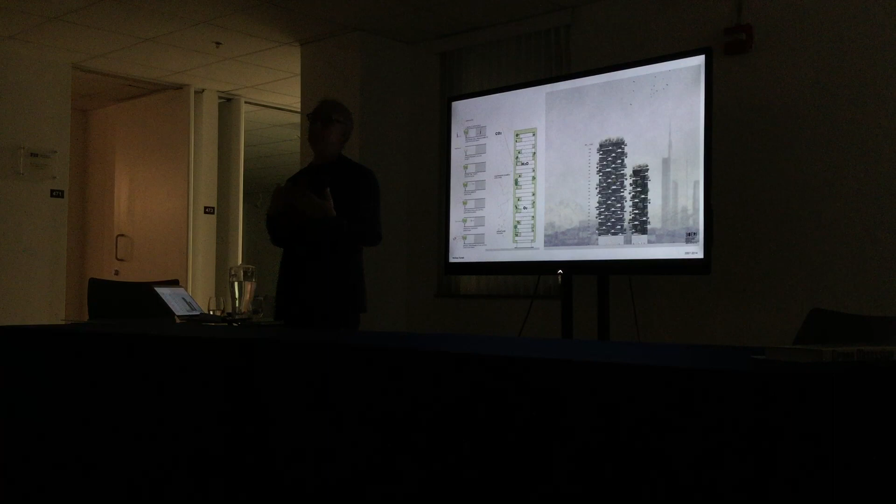So that was the beginning, an obsession of sorts, thinking how to put plants and have real trees, not simply shrubs or simple plants, on these two high-rise buildings. We started to study the possible contribution in terms of capacity to absorb not just CO2 but also pollution, the micro-pollution, the microparticulates produced basically by traffic.

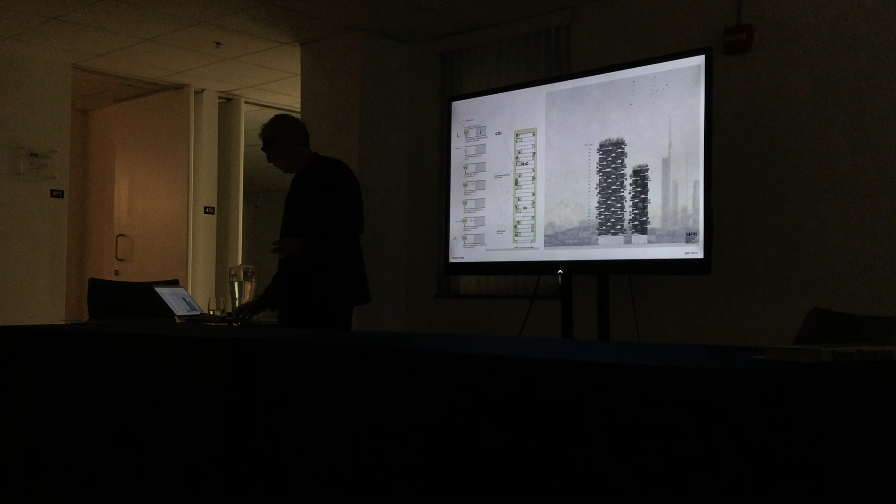We studied all that, and finally that's a result. This is a picture from some years ago. So basically we have here 21,000 plants in two high-rise buildings. One is 115 to 120 meters, and the other is 95 meters. In terms of feet, I don't remember now.

We also started to study the effects of that: how seriously they are contributing to reducing greenhouse gases, how they are cleaning the air, how they are protecting, and something super important, how they are shadowing the facade. So it's kind of a double facade, the biological facade and the artificial facade. The biological facade creates a microclimate condition that also shadows the second facade. The difference in summertime in Milano is about 3 degrees, not Fahrenheit, but Celsius, and it's quite important as one of the most serious effects of this tower.

Thanks to that, thanks to this prototype, which was really a result of something in between research and design, we started to work trying to improve what we did, and also to make this building like a real experiment. We studied the success, the expected success, and also the unexpected unsuccess, the problems, the limits of what we did. And when we finished building this, we immediately started to see how it was possible to replicate this concept of the vertical forest in different contexts, in different sites.

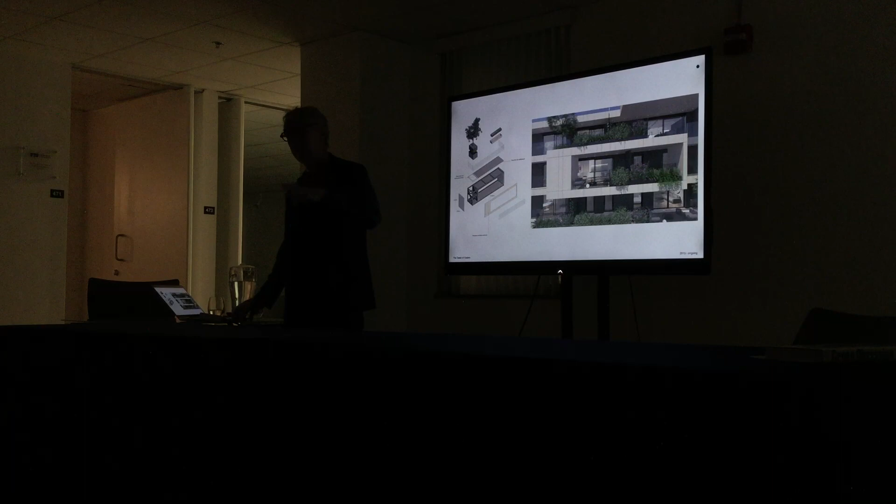We have to respect and study the evolution trajectory of every species, and once we know that, we understand how we can design the empty space between one balcony and another, between two loggias, between two parts of the composition of the architectural facade. This was important in Lausanne because we were working with different families of cedars, and this is in construction in Lausanne.

But that's another step we did. So we are in Eindhoven. Eindhoven is in southern Holland. It's a very important city because it was one of the most famous industrial regions in Europe, home to Philips and many other things. In that case, what we did was try to cut the construction cost, and you see here what we did.

The result is a high building with hundreds of trees and plants in social housing. It's really affordable for students, groups, and young professionals. This is really a step forward for me, and very important for helping us develop other projects like this one in many different parts of the world that are affordable vertical forests. So vertical forests are really in a condition to be used by everybody.

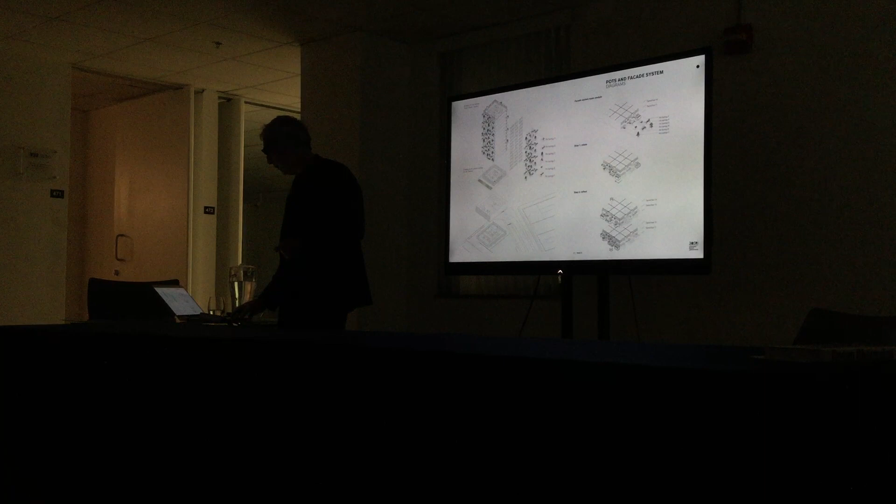In this case, we did this thanks to very serious work around prefabrication. Not simply the pots, but also the linear part of the facade, are the result of prefabrication techniques. This building is very promising in my opinion, and works so well, used by hundreds of students and young professionals. It's a very simple layout, but also very flexible in terms of how it can be used, reused, and transformed, and is sometimes completely transfigured by the professional user who makes the building.

This is our process when we go to visit the material - you know what happens. We need to see where we go. So every time we have a kind of botanic nursery, you could call it that, near the construction site, and we go there to select the plants and trees, to follow how they grow, and to see how we can then move them to the construction site. That's also what we did in the case of Eindhoven. We have replicated the same thing in Huanggang.

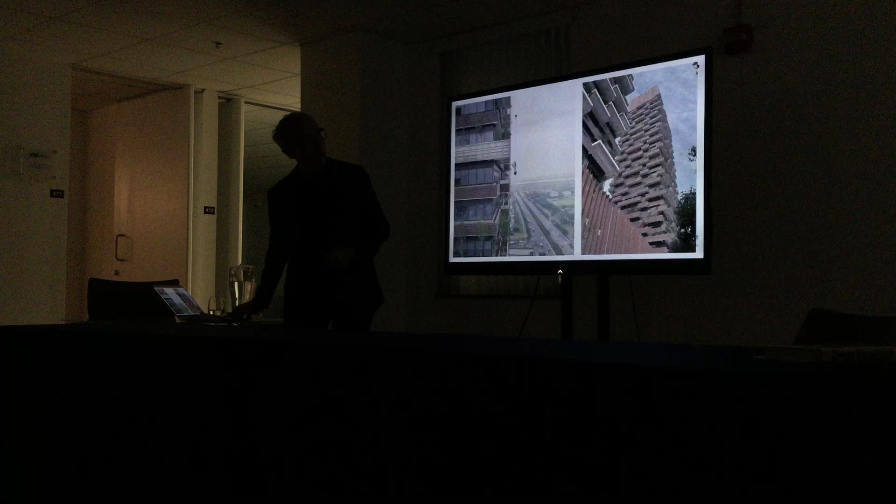This is China, a very affordable social housing vertical forest, and we are now in construction in many other parts. I'll just sum up some examples. This is Nanjing, still in China. What makes this project interesting is that it's super high rise, but it's also one hotel and one office building.

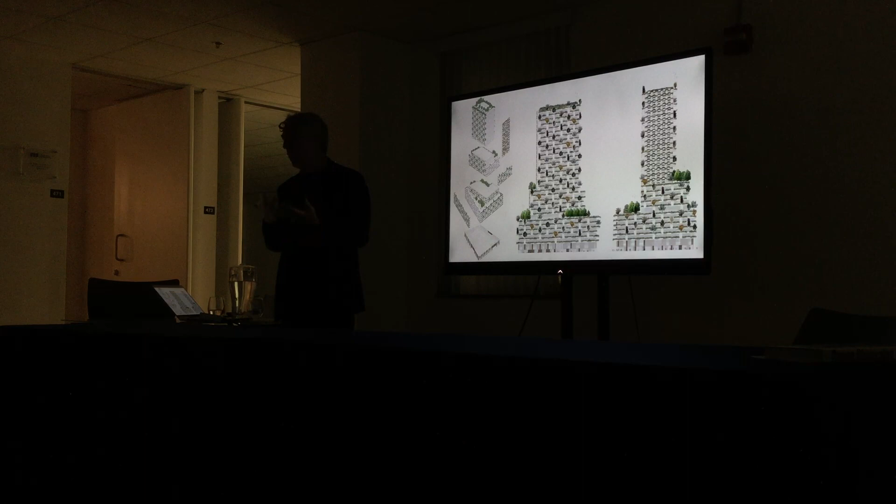This is Utrecht, and in this case the building is interesting because it's mixed use. It has a commercial basement, office, and different floors of residential, and also in this case the variety of species is quite relevant, and we have changes in the facade. For sure, we are every time considering the climate condition, but also the windy condition, humidity, and many other limits or constraints. That explains why we sometimes have to change the relation between artificial elements and plants.

For instance, in Northern Europe or in northern China, we decided to use plants that lose their leaves in wintertime, just to let the sunlight enter better on the southern facade. When we started to work in places like Cairo, the point was to create a kind of serious filter that could make the interior of the building comfortable.

This is in construction in New Cairo, and that's some of the other projects we've done.

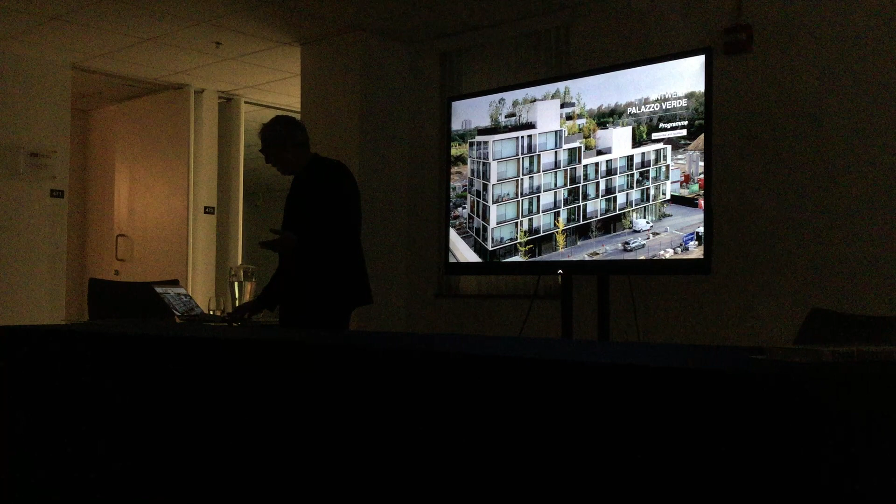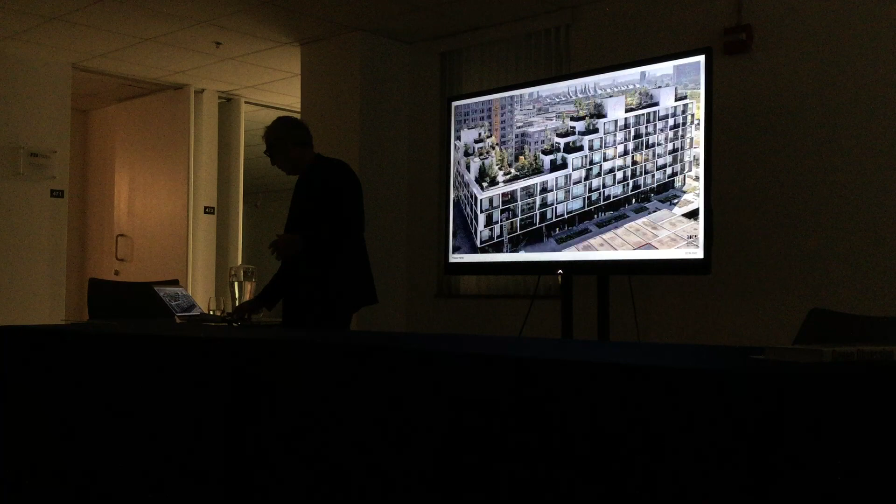This is in Italy, a project we just finished building at a different scale. And this is another version in Antwerp, Belgium, where in this case we worked more on the roofs, so the green roofs become common goods, a common place for all the tenants of the building.

We developed the same kind of concept in Milan in another project called Bosco Navigli, which is a high-rise—not seriously high-rise—ground floor, but it's a courtyard building. It's not simply a vertical building with all the facade covered by plants; that's a different version of what we've done.

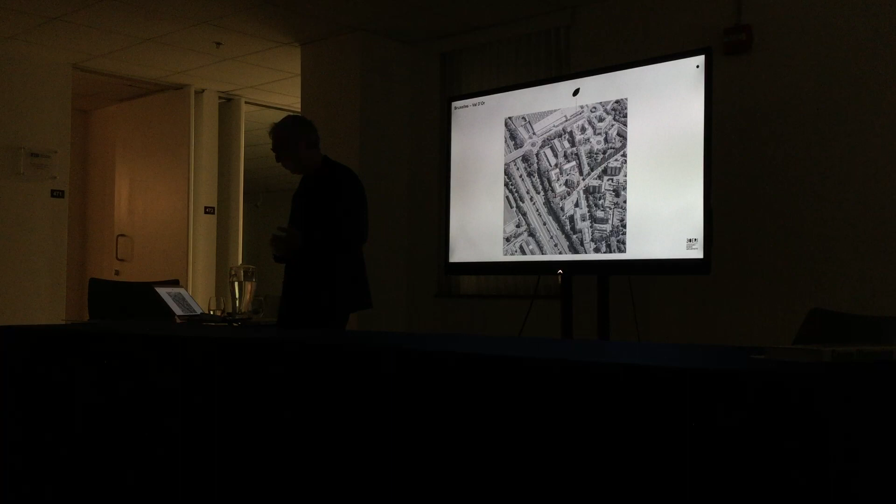At the same time, we've been asked to do things we weren't expecting, like in this case in Brussels. I show this because it's a completely different approach, but interesting. A client asked us to transform a huge public free office building into a green architecture and residential building.

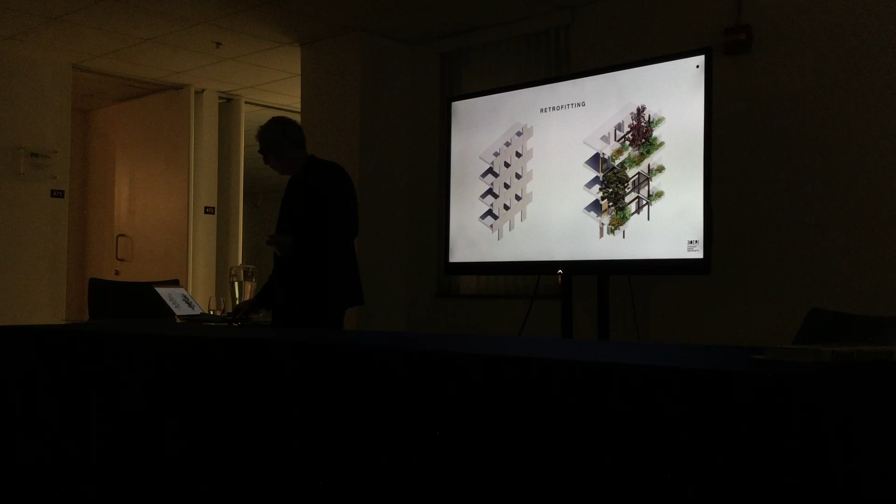This was also a way to be sure that what we do could be used to change the quality and the nature of existing buildings, not simply to build new ones.

Another step we're taking is in the construction material itself. This is an example: a competition we won with Diller Scofidio in Milan. They are retrofitting the building you see on the right, a well-known building from the 60s. And this is a tower we're designing called Botanica.

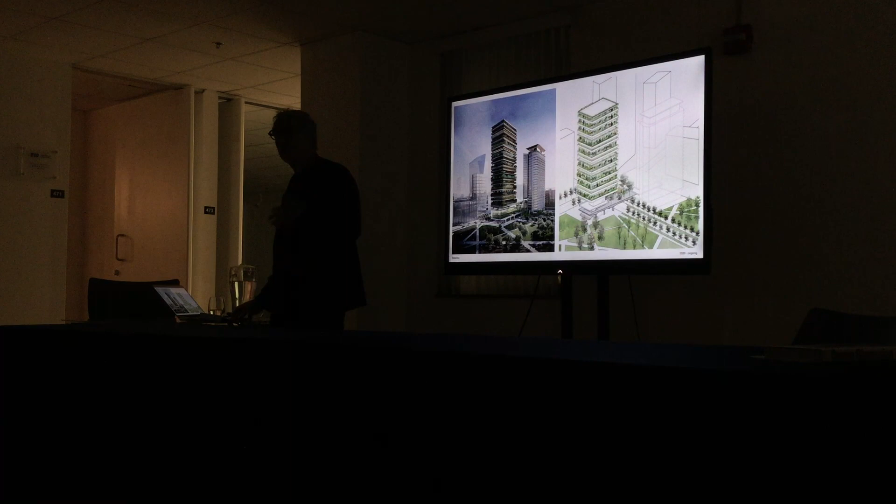In this case, we're using wood, timber, to create the slabs, and you know how much this can cut CO2 production in the construction process while at the same time fixing CO2. It's such a great, important, serious, useful, and efficient contribution to making this building truly capable of addressing environmental issues.

I didn't talk about this, but from the beginning we started putting together different elements of construction—it's not only about green. We know these buildings are, in a way, individual ecosystems that host cohabitation of humans, plants, and birds.

In Milan, we have more than 20 different species of birds nesting. We did the same in Holland, the same in China. It's so great to see how they really introduce a different biodiversity in terms of cohabitation.

At the same time, we use solar panels on the facade, also on the vertical side, as part of the balconies and loggias. We used geothermal water, and we're now working a lot on water management, which is so important.

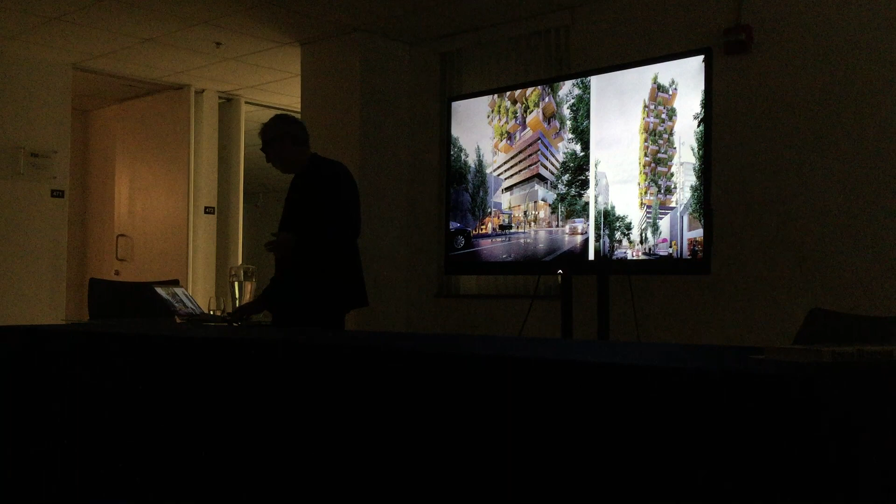There's another project in Paris, and this is one of the last projects, in Sao Paulo. It's interesting because it's also a mixed use with a very mineral basement, but as you go up it changes and reflects the layout of the building.

And this is what we presented in Sharm. It's interesting because, like in the case of Cairo, it's quite an extreme attempt to show that it's possible to do things like this in a very extreme, arid, and developmental condition.

And so in that case, we're also introducing hydroponic agriculture inside with a system of greenhouses on different parts of the buildings, and water management where desalinization is connected with renewable energy from the solar energy of the sun. This is also something we are now following with the idea to make it really possible.

But that's one chapter of what we do. We also try to make this attempt a condition to create effects at a different scale. So just to show you some of where we're involved: this is Milano, where we launched a campaign to plant 3 million trees, and we are now working on the system of abandoned railyards, reintroducing this idea of a green connection between different parts of the city, how they can change and improve in a different sense.

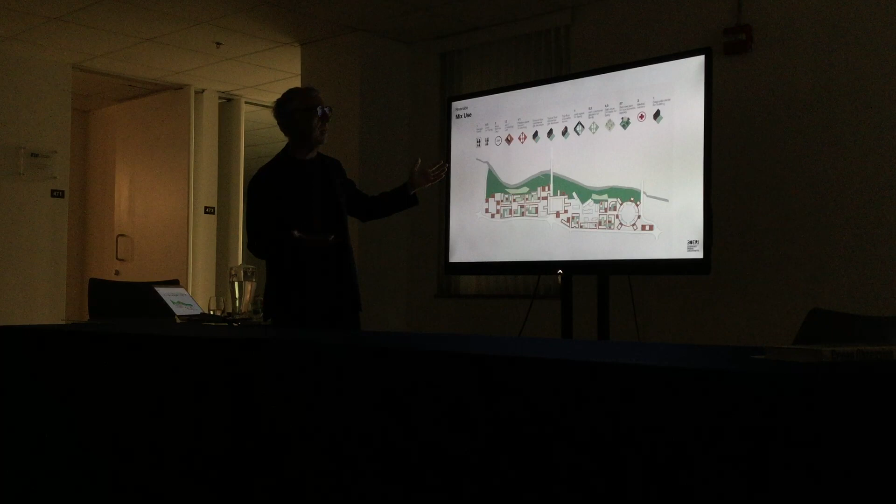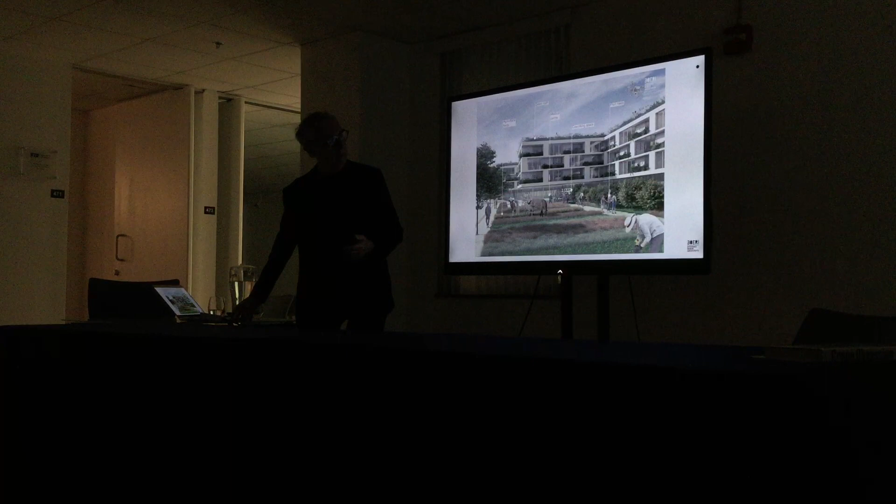It has also some interesting character in terms of allowing every citizen to find the utilities they need in the cycle of a day, in order to have, let's say, we used to say 15-minute city, or 500 meter city, but it's something that is quite important, and how to make it work.

And in this case also, for instance, we are proposing to use the roofs, like we have done in Antwerp, as public space, a space where they can, in a way, replicate the role of courtyards in European historical cities. And the use of roofs, I think, will be part of the future of what we will do with architecture.

At a different scale, we have been asked some years ago to design a possible evolution of the Genève city metropolis in Switzerland. And that's a result.

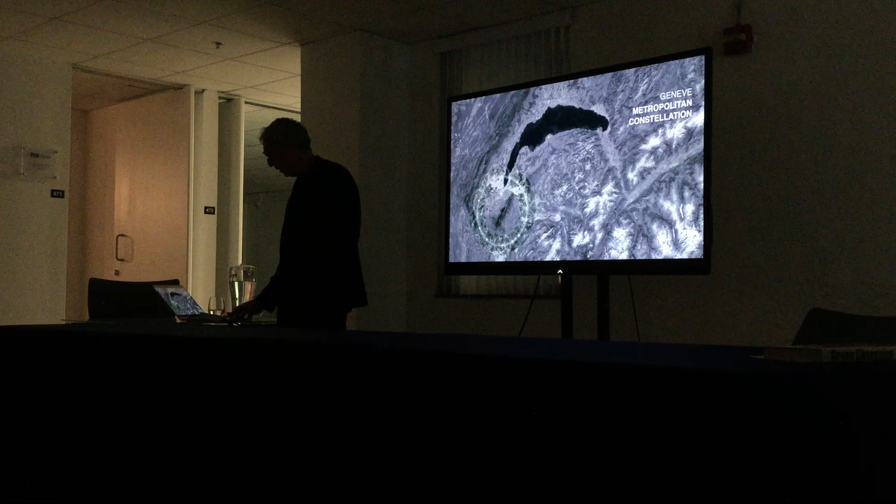What we proposed was to imagine extending the city not along the lake, but creating a constellation of small urban centers. But the point of what makes this proposal interesting for me is that at the center of this new conurbation, which is also surrounded by trees and forest, you don't have a square, you don't have a church or a synagogue or a mosque or a monument — you have a mountain.

So the idea was to connect Genève and another city, here in France, having at the center the Salève Mountain, which is also a place very interesting from the point of view of biodiversity. And we are, let's say, replicating on the surface of this land what CERN is doing, creating this kind of accelerator — the new accelerator has the same circumference as what we do.

So that was a way also to make these two conurbations more efficient, and it was also a way to use that. And here we have an image of what will be seen from the top, the center of this new metropolitan environment, which has at its center a natural environment, a mountain, not a square, not a public street. That was, in a way, a provocation.

I know that, but it's something we believe to be extremely interesting and hopefully stimulating. There are parts of the world where we still need to build cities. It's not the case of North America, it's not the case of Europe, but for instance in China, we have 13 to 14 million people every year that abandon the countryside.

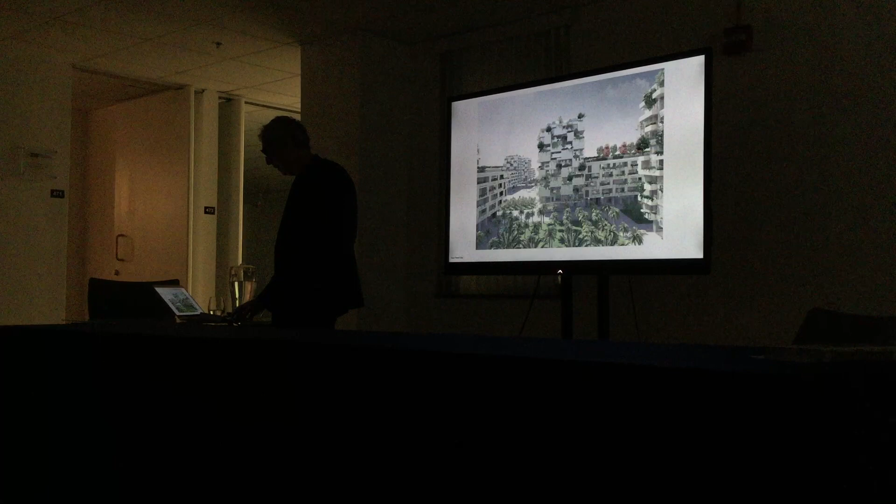And this is Mexico, this is Cancun, nearby Cancun, where we have been asked to intervene after a disaster produced by a small Chinese company that was destroying part of the mangrove forest, creating this huge concrete surface. The project was blocked by the municipality, and they asked us to manage a different project, and we proposed to do that.

It was a university, a city with more than 8 million plants, and it's just at the moment a proposal, but we are discussing it and going ahead seriously, detailing and combining different parts. The idea was to have a buffer of solar panels and greenhouses, so it could really find a way to defend self-sufficiency, not simply in terms of energy, but also in terms of transformation of agricultural products into food. This is the Cancun project.

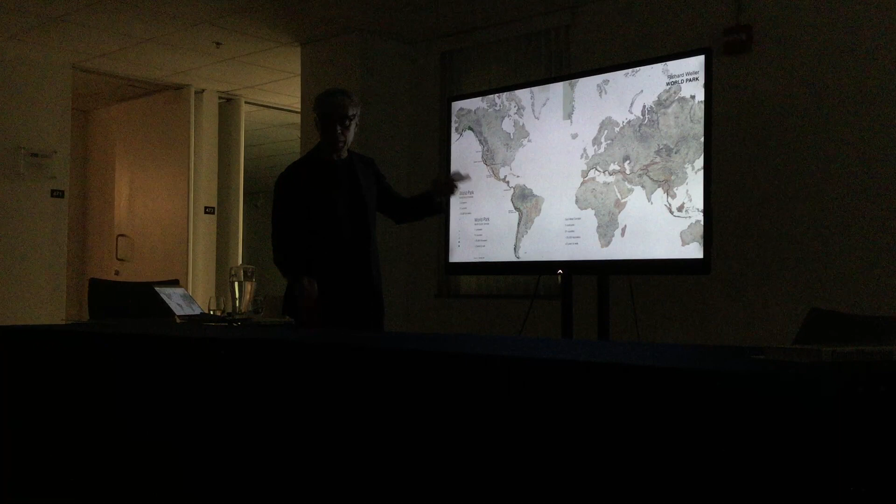Just to conclude, some concepts at a different scale. You probably know Richard Weller. He's a genius in a way, and he invented this idea of a World Park, which is a very simple concept. If we put together the biodiversity hotspots that we have on the planet, we can really multiply the advantage of this biodiversity. So the World Park is about connection, connectivity, biodiversity — the two key entries of the future. He studied that to simply see what could be done, and he was calculating the amazing advantages of it. But we know something is already happening in a way.

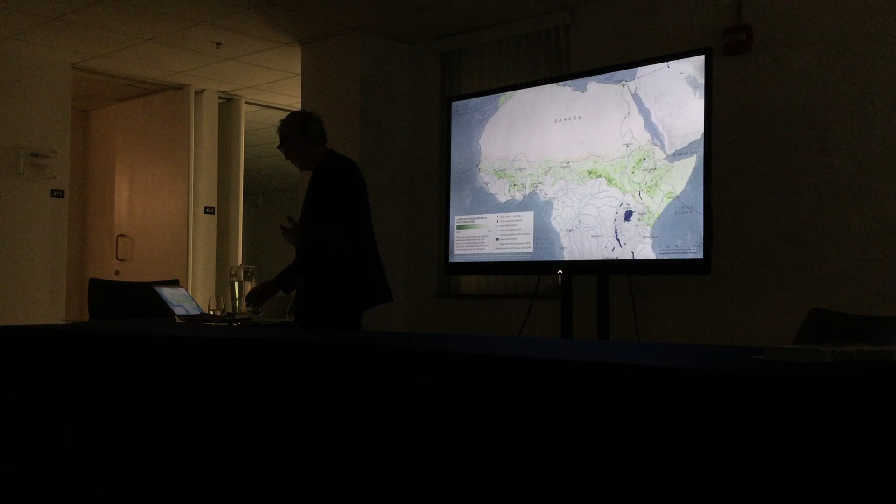Also in parts of the world where climate conditions are extreme and complicated — this is Central Africa, just behind the Sahara Desert, where this Great Green Wall, which 9 countries from Senegal to Ethiopia started to build thanks to the African Union, began in 2007. Now this attempt to create a green barrier could start to stop the extension of the Sahara to the south. It starts to work, with a lot of difficulties and complications, but it's there. It's an amazing lecture that we seriously have to learn from and take into consideration.

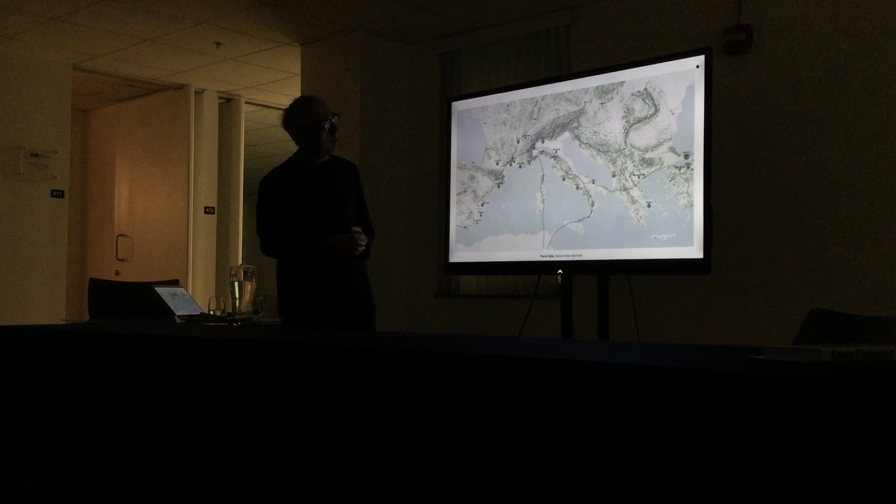So going ahead on that, we started to imagine how to create these biological corridors, planetary corridors, in different parts of the world. For instance, in China, where they have the same problem stopping the extension of the Gobi Desert. And this is what we're working on today in Italy — creating a system of biological corridors that involve cities, not simply as obstacles to this idea of a biological corridor, but as places where, thanks to this new alliance between living nature and artificial environment, we become the generator of a new condition. I stop here.

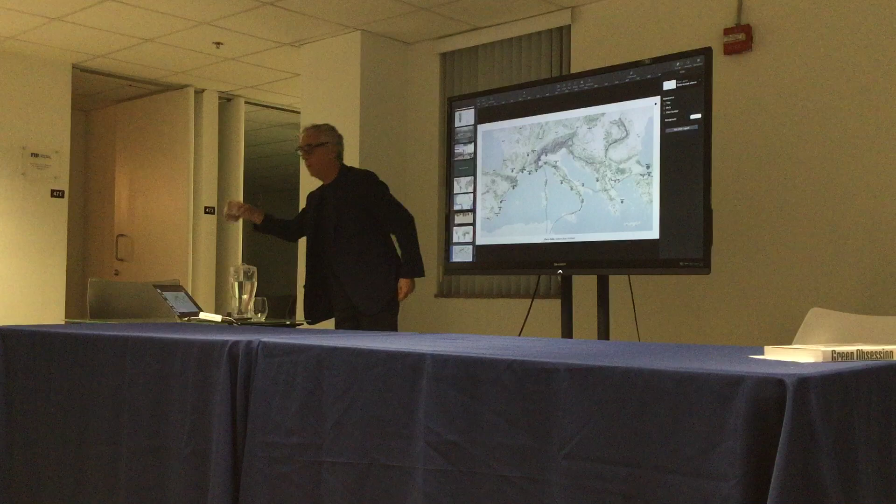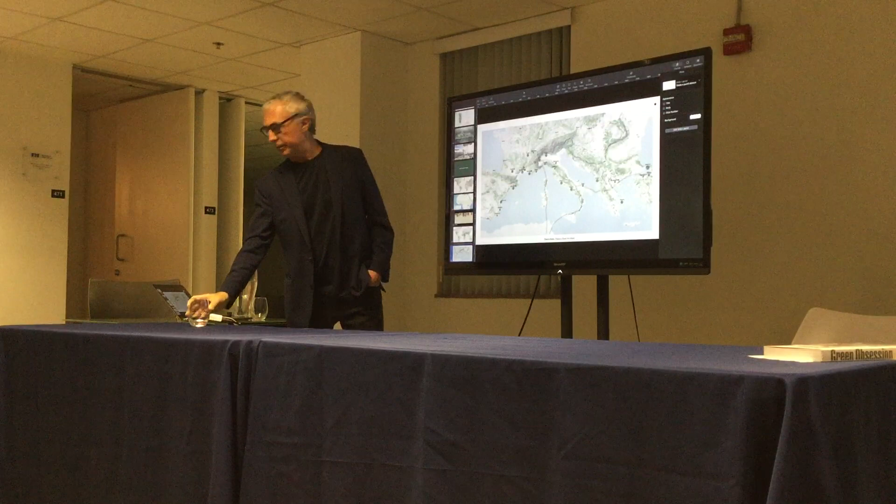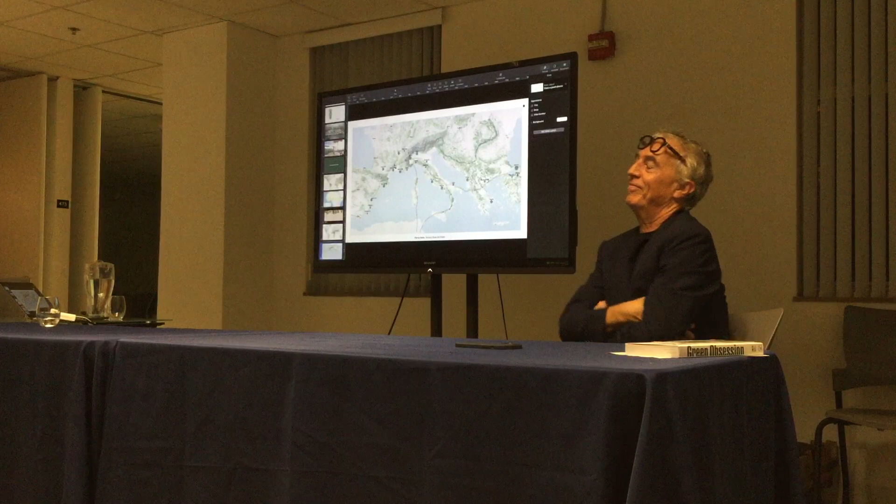So a lot of your work was concentrated in Europe, and I'm wondering if people in Europe are more receptive to what you're doing than people in the United States. I know somebody was trying to do something similar 20 years ago in Boston, and I don't think it got anywhere. So I'm wondering if you've tried projects here, and how receptive the United States is. Well, I have some hope to do something in the United States. We are working in Chicago — we started before COVID — and we also had an amazing opportunity in New York, though it was delayed. Miami I think is an amazing magnet, an amazing place for the future of this possible combination of living nature and architecture. So I don't believe it's a question of culture. Maybe for us it was easier to work in China, or in Africa, or North Europe, simply because, well, I don't know, it happened. But there are so many very good architects doing the same in the United States. We are working in South America too, but yeah, it's a good question.

Yes, fantastic projects you're working on — I took so many pictures, my camera already ran down and now it's completely out. But I wanted to ask you: you said you presented at COP27, is that correct? Yes. So what kind of momentum do you think urban forestry has as a result of either Sharm el-Sheikh or the collective of COPs? I think it's, as I was saying, quite delusional.

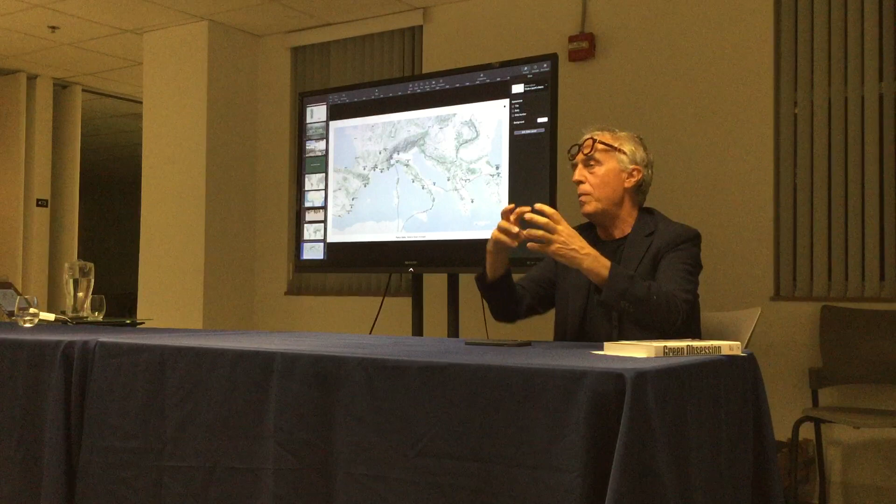For instance, do you know what post-tensioned slabs are? That was a way we started to calculate how the presence of these big pots on the perimeter of the balconies could be better balanced. But to go more into detail, it's so important to define the right chemical composition of the ground, because you cannot have a ground that's too light, otherwise the roots suffer, but at the same time not too heavy, because when it's raining, gathering water becomes very complicated. So we have some criteria we follow, but it changes every time depending on the material we're going to use—for instance, now we're starting to use timber, and that changes things a lot. So there isn't one single answer; there are many possible answers related to the specific conditions, the specific selection of species, related to the climate condition. It's always a balance between different parts of the world.

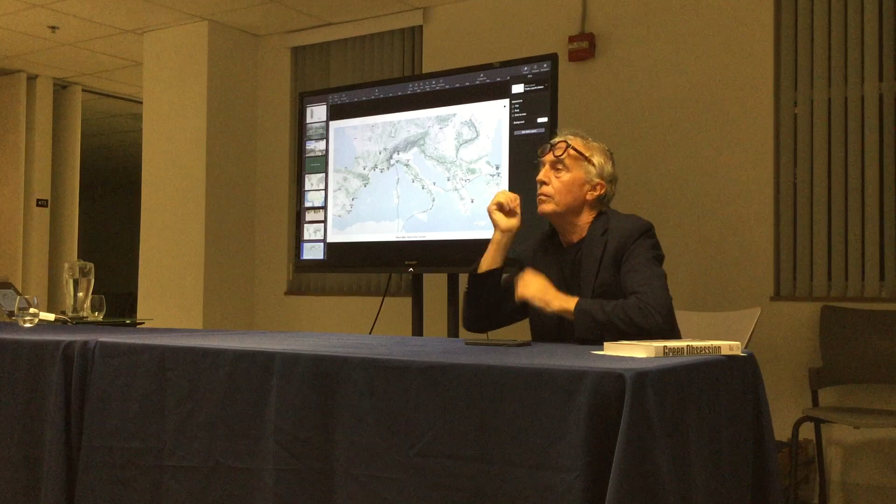For years I've thought it was almost architectural malpractice not to see a new building going up without a garden on top, a food garden. So I thought, do any of your projects also incorporate food gardens?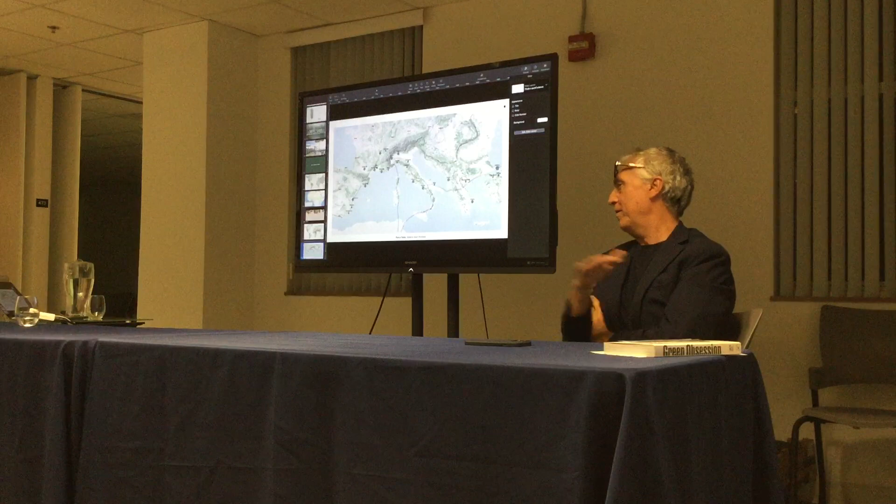Yes, we're starting to do that. In a world today where so many people are starving, it's so important. We are working more with hydroponic culture, so instead of having a normal traditional garden—but I'm sure the idea of vertical farms, for instance, if we connect vertical farms, like we're going to do in Dubai, with this kind of diffusion of trees on the facade of the building, we can enrich the architectural solution and also enrich its efficiency.

It's also really seriously connected with water management, which is one of the most complicated and, at the same time, important and interesting issues of our work. We work with a group of engineers that calculates how much water we use, how much grey water we recycle, how much water we can draw from the ground to reduce the thermal excursion in wintertime and summertime, how much water we can use from the rain. In this case we are using an Israeli irrigation technology which is extremely efficient in terms of monitoring the humidity of the pot while calculating the irrigation. So water management is basic to what we do. Sun, water, and wood, I should say.